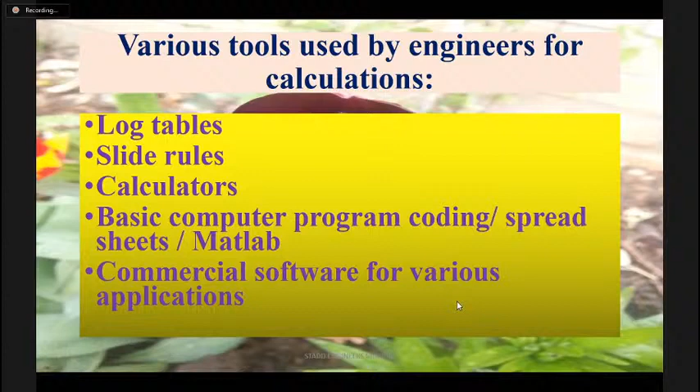And then going further, there are some commercial software programs. Those are of course available for various different applications. I am just going to show you the summary of the programs which are available for civil engineers. But in principle, we have to understand that hand calculations cannot be substituted - there is no substitute for the basic engineering understanding, even by any powerful software program.

So what kind of programs are available? Just for information, I think everyone knows about that, but I'm just making a list of the available tools. I call the software program nothing more than a tool, a very advanced tool. So there are different categories.

One is a drafting tool, which we need all the time in engineering offices. The most popularly used is AutoCAD, used for making our drawings or sketches, the drafting part. MicroStation is another program used around the world, similar to AutoCAD but a different platform, of course.

Autodesk's product is AutoCAD, and MicroStation is the Bentley product. Then there's another program becoming more and more popular because it's very cheap compared to other software programs, the ZWCAD. There are so many other CAD based software available, and people use these tools basically for doing their drafting part.

Then there are some finite element tools also available, generally used in all the research institutions. If you look at any MTech or PhD projects, I think most of the work nowadays uses these finite element tools for their projects.

There are popular programs available, like ANSYS, which I think is the most commonly used finite element program package. Then Cosmos, SolidWorks, Abaqus, Nastran. There's a very big list available, but I've just noted a few programs.

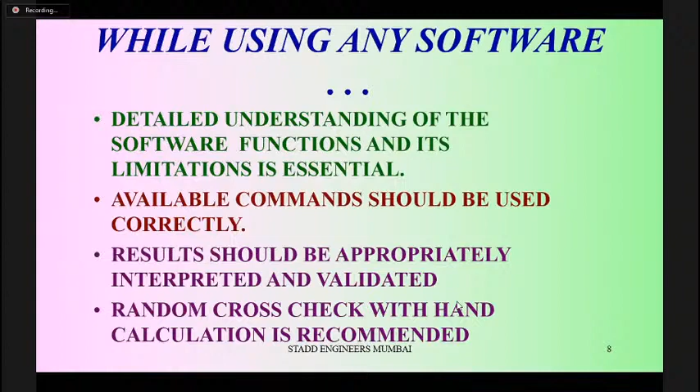For that, you should have some basic calculations with you. We insist that some random cross-checking is very helpful, comparing results with hand calculations. So STAAD or ETABS may be designing hundreds of beams and columns, but at least one column you should do by thorough hand calculation. You can take out the forces from the analysis, or do a simple moment distribution calculation to get moment values. Then check the steel required, the stirrups required, and whether the software gives values close to that. Cross-checking is very important - I cannot rely 100% on any software in the world. That must be very clear.

Now focusing specifically on STAAD.Pro, which is mostly used by design offices - many people use it, a very popular program for analysis and design used world over. This is a general purpose software, so there isn't just a specific type of structure it analyzes. Any kind of structure you can model - a dome, or different types of truss configurations, you can analyze.

But ETABS is specifically for building type structures where you have a typical floor plan, mostly concrete structures - it's very powerful there, and also popular. But STAAD is a general purpose program - any type of structure you can analyze and use this software for.

Data can also be transferred to other modules, for creating drawings, connection designs, or foundation designs. Once you do the analysis, you can transfer the same data to another program. In ETABS and SAFE, once you analyze in ETABS, the data can be taken to SAFE for foundation design. Similarly, once you do the analysis in STAAD.Pro software, the same data can be transported to the STAAD Foundation Advanced module. Basically, the support reactions are transferred, and you start the foundation design from those support reactions.

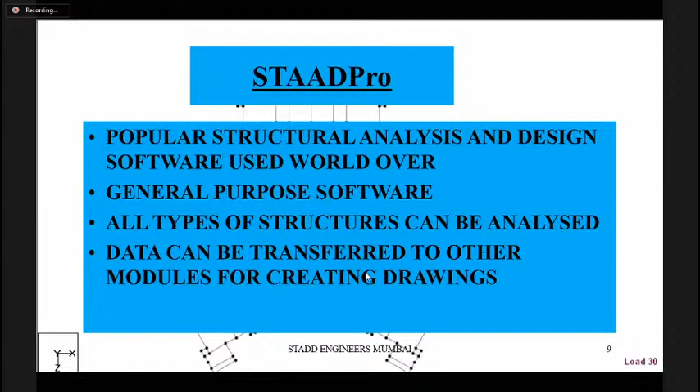Now I'm going through the small steps in the model. I'm not going into details of all the software packages, but the important steps and critical points you must understand, I'm noting down. The first important part is understanding what the software computer program basically does.

We have to make a model which the computer program can understand. We have the real life structure which we are going to construct. So we are trying to simulate the real life structure into a mathematical model which the program or software can read. It is a mathematical simulation process, basically, what we are doing.

The results depend on your model, how good and how accurate it is. So the accuracy of results will depend on the model you build. But from my experience, I suggest it is always preferable to have a very simple and approximate model than a more accurate but very complex model.

People try to use very accurate models with secondary members, small cutouts, small beams, fine meshing for all the slabs. By this, the model becomes more and more complex, and you feel you get very accurate results. But I think that is not the case, that is not the real case.

An approximate model with basic framing is good enough. I prefer the approximate model all the time, because if the model becomes more and more complex, you are likely to make more and more mistakes in it. That is the real danger in a complex model.

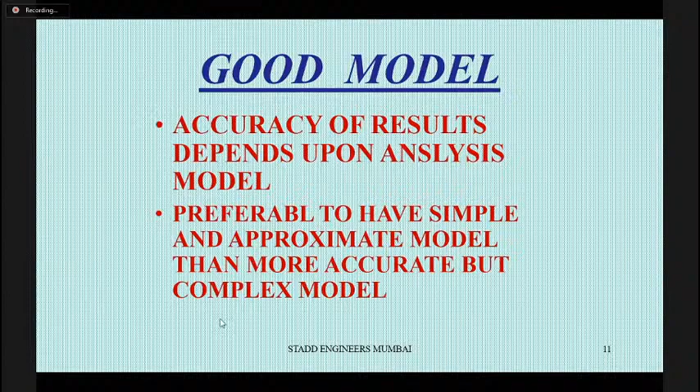We have to keep all this in mind. Sometimes we face problems in government departments, where proof checking is done by certain people who literally check number by number with decimal points. I think that is not how civil engineering works - you have to grossly see the range of the results, that is more important.

Structural arrangement is to be decided in consultation with your architects and clients. You need experience to do a better structural arrangement, which gives better structural performance and an optimal solution.

How do you decide preliminary member sizes? There are some guidelines available, but that mostly comes from experience. Once you've done different types of structures, from your database and experience, you can decide what column size or beam size will be required for a particular type of structure.

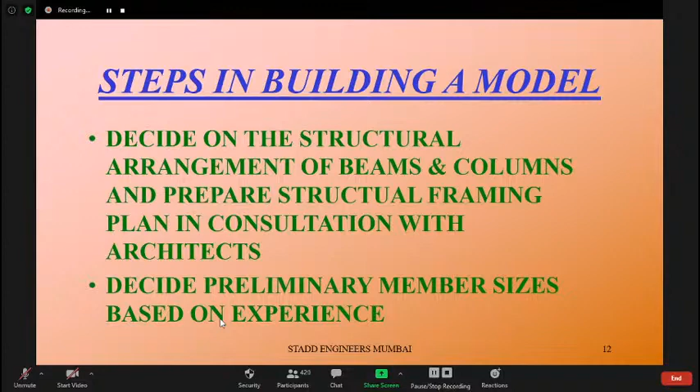These are the basic steps for building your model. For any computer program, you cannot just say 'this is my building, do the analysis' - you have to give all the properties and sizes initially, even for the analysis. The program cannot decide on its own what kind of sizes you need to take.

There are different ways you can generate a model. There is a simple text editor available, and you can also make a model graphically. A structure wizard is also available, from which structural libraries are available.

You have to just pick up the structure and then modify it based on your parameters like height, width, and the spans. That can be modified. Or you can, of course, import from CAD.

Apart from the first part, I think the three steps are generally available in all the graphical modules in other software packages. That has got the advantage. It has got one more option of a text editor, which is, I think, more popular and more powerful for making the data very fast.

Once you make a model, again a simple model with frame members, you can make a data file which can again be analyzed graphically. You can check it. So you can make the model with finite elements if you wish.

But slabs are generally not required to be modeled with finite elements. People sometimes say, okay, we model everything. I think ETABS does that. There is an automatic mesh option also available.

But basically the slab loading has to be transferred to our beams, and you have to take the diaphragm action into account. That is, I think, the more important part. So that can be indirectly taken care of in the STAAD program as well. There is a diaphragm option available so that you can use it.

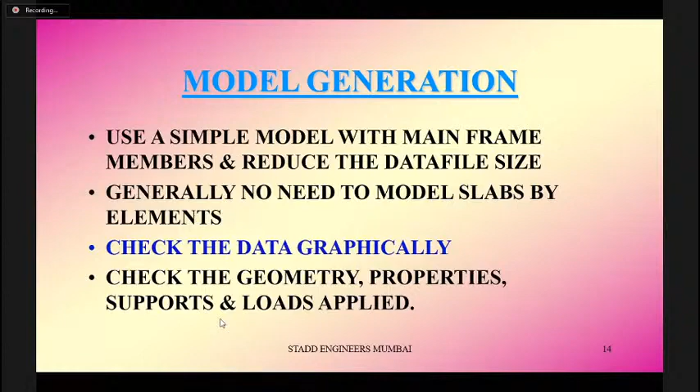Then you have to specify the constants, like what kind of material you are using, the modulus of elasticity you need, the Poisson's ratio, and density. These are very important constants you have to give, along with the supports. Without that, you cannot build a model. So these are the prerequisites for generating the geometry for your structure.

So this is the basic preliminary model that you have to make first. Once the model is ready, you have to check it graphically, and then you go for the loadings.

Based on different codes available, dead load, live load, seismic loads, and wind loads, you have to apply the loads on the structures, and then do the combination of loads for the design purpose.

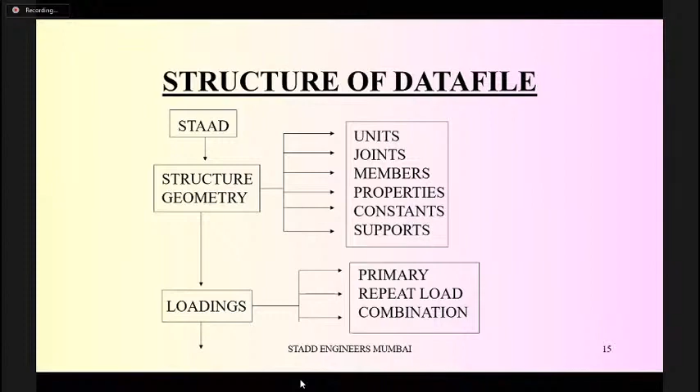Once the loading is applied, you have to check it with the graphics, whether loads are applied correctly. The summation also you can get, and check whether the loads given are correctly applied on the structure or not. And then you can perform the analysis using the software program.

And then after doing the analysis, you get the output. In the output, what you basically get is all the geometry you can cross-check, you can get all the support reactions, all the member forces, including your bending moment diagrams, the deflection diagrams, and all these things. That is a part of your output.

Different load combinations as per code provisions - say IS 456 talks about different load combinations for the limit state method. So for that particular combination, you can go for design. The next step will be your design, either concrete design or steel design.

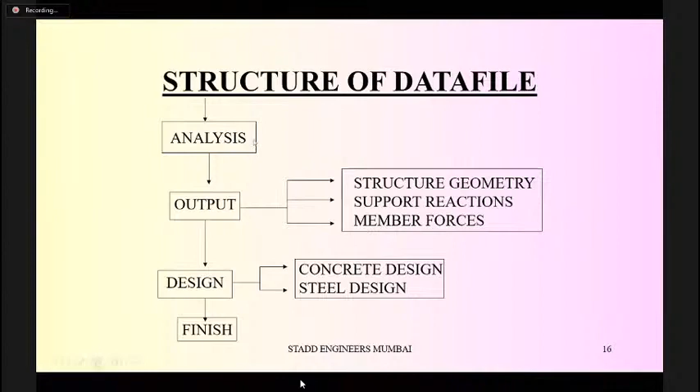Now, steel design also, as per the revised code, is as per the limit state method. Earlier code talks about the working stress option also. So some programs provide the facility for working stress as well as limit state both. So this is a general flowchart for any kind of software program, how it works and what steps are involved in using the software package.

Now I'll just run through the steps again. Different units can be used in the software. Again, you have to be very, very careful in defining the units. Generally, we should have consistent units all the time, so there is no confusion.

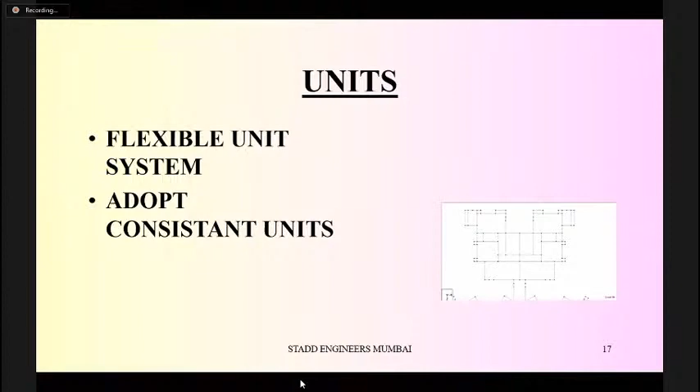So you start with kilonewton and meter, then keep on using the same unit. Otherwise, in between, if you use different units, there may be some confusion sometimes. So that is, I think, one of the important parts one has to remember. But instead, you can, of course, choose multiple units in different locations.

You can give property in millimeters, define member or joint coordinates in meters, and so on. I'm not going into detail on everything, just explaining the steps involved. You have to define all the intersections of the structure, the joints, and then connect those with a member, which forms your beam or column.

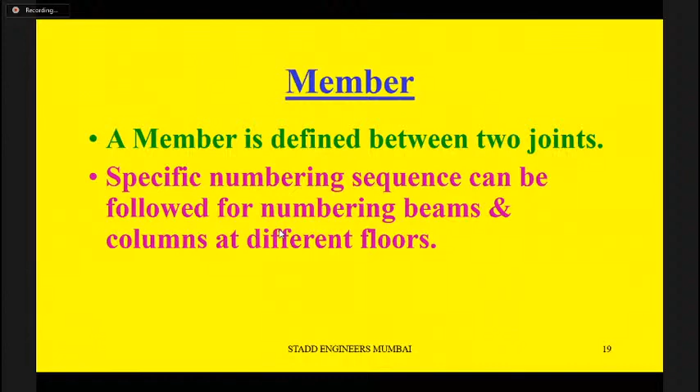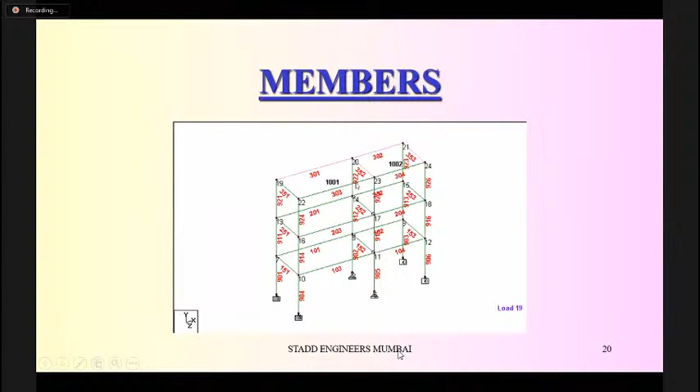Again, people using some software package may not fully understand the application. For example, connecting a beam element or column with a finite element, which is a 3-dimensional finite element, can give you instability.

So there are some instability problems. One has to understand what kind of degree of freedom to use in a particular system. If you define a structure and declare all the supports as, say, rollers, the entire structure can keep sliding, causing a stability problem. Software is a tool, but you have to use it correctly, otherwise you will end up with problems.

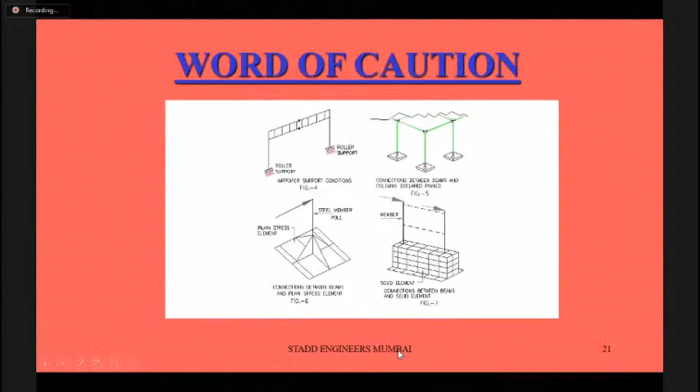Once the structure is ready, you have to give the properties. It can be from the steel table for steel structures, or prismatic sections for concrete sections, or you can have tapered members also. Profiles are also available that you can assign.

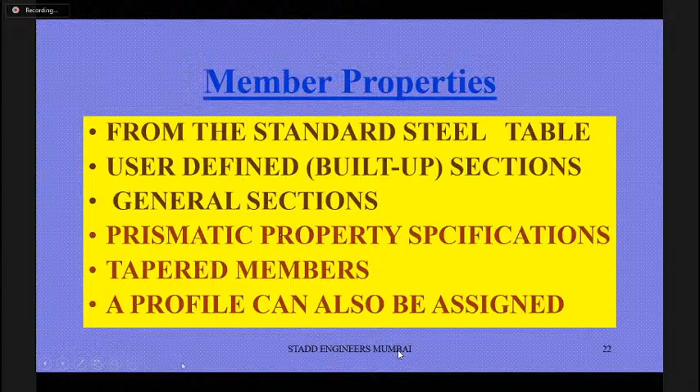I'm not going into detail on elements, but these are some precautions on how you decide the element. If you're studying finite element analysis and application in post-graduation, this part is more important. Software tools are available with guidelines, and automatic meshing is also available nowadays, but some basic fundamentals should always be understood by the user.

The aspect ratio of the element should not be more than 4, otherwise you will not get a good result. The element should be convex, not concave, otherwise you'll land up with problems. These are some finer points one has to understand while using this type of software. Otherwise, people use the software but get erratic results, and there are reasons for that if not used correctly, which one has to understand.

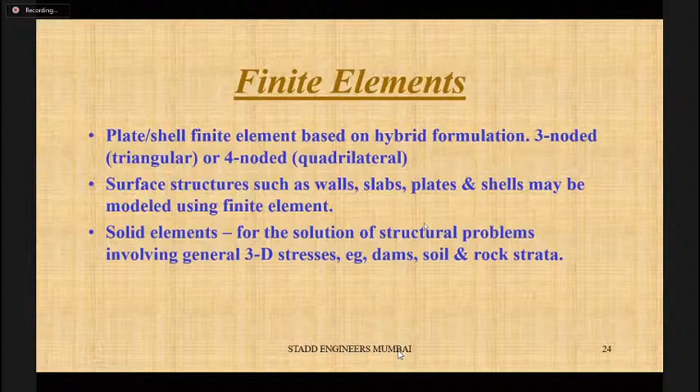So based on the type of application, you have to choose the correct type of element for the model. There are some miscellaneous commands always available in all types of software. One is the orientation of the member, which is most important, otherwise people make mistakes on whether the column is placed horizontally or vertically. You have to tell the software correctly, otherwise the results will be different.

Then there are some member releases, I will show you some pictures for that. Sometimes it depends on the connection you are designing for a beam to column, and then you can release a moment. If you are designing just a shear connection, it will not take any moment.

So in that case, in your model also, you have to release the moments, otherwise the results will not be consistent. And there is the member offset command as well. I will show you some pictures for that.

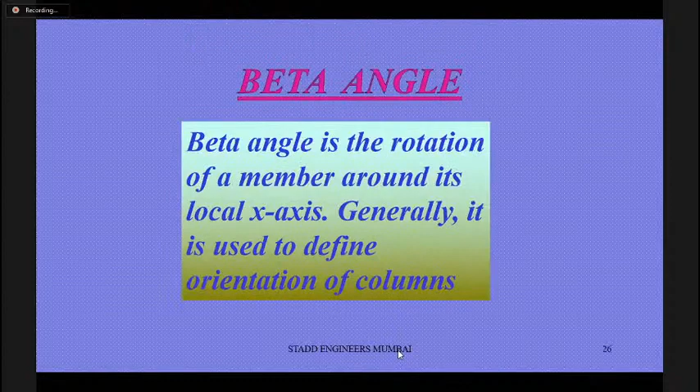Beta angle is the orientation of the member around its local x-axis. That is what is called beta. In the next picture, you can see it very clearly.

Beta is 0, the column is in short. If you see in plan, it is oriented horizontally. But if I want to turn the column in the vertical direction like this, I have to rotate it basically by 90 degrees. So that is what is defined in terms of rotation angle.

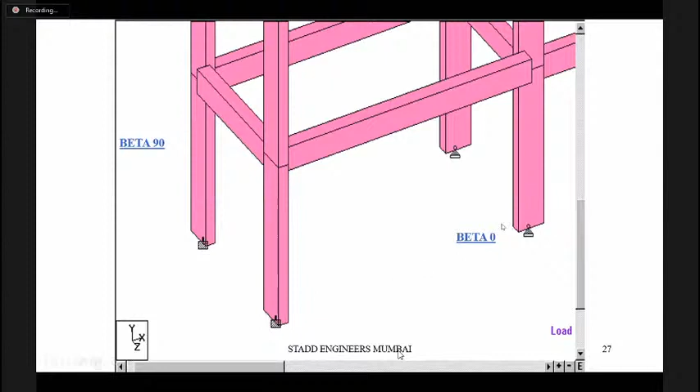So the size is same, maybe it's 230 by 600 in both cases, but one is horizontally oriented, one is vertically oriented. So you have to tell the program what your intention is.

Then, as I said, member release is again an important option available in most software programs. Whether one end is to be released or both ends, it depends on the type of structure you're analyzing and the connections you are going to use. Sometimes partial release is also possible, but it's a very tricky command — you have to use it with caution and full understanding.

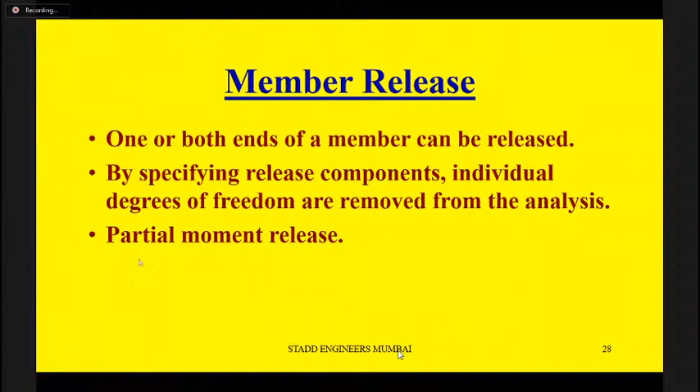So that's the most important thing. Member release is also a very important command.

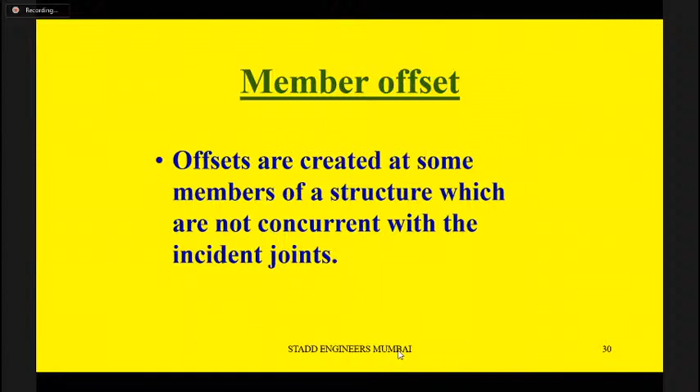The load is transferred at the face of the column here with this much eccentricity — half the depth of the column is the eccentricity. If you want to take that effect into account, you can use this option. As far as the offsets are very small, it doesn't matter much in the analysis, but if the column is like your shear wall, it makes a lot of difference. So one has to understand where exactly to use this command and where you can ignore it — that is your expert judgment.

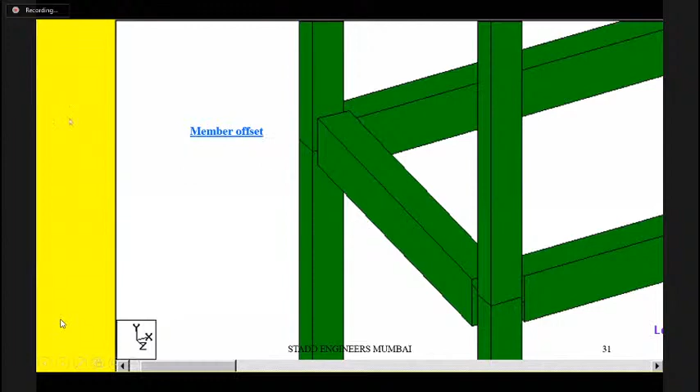That is very important. Then there are some special types of members also available in STAAD, for example active and inactive members, used for bracings, because bracings are capable of only taking tension, for example, and otherwise they are inactive. They take only lateral loads whenever there is wind and earthquake load, so those bracings are designed only for that type of loading, but for vertical load, they are made inactive.

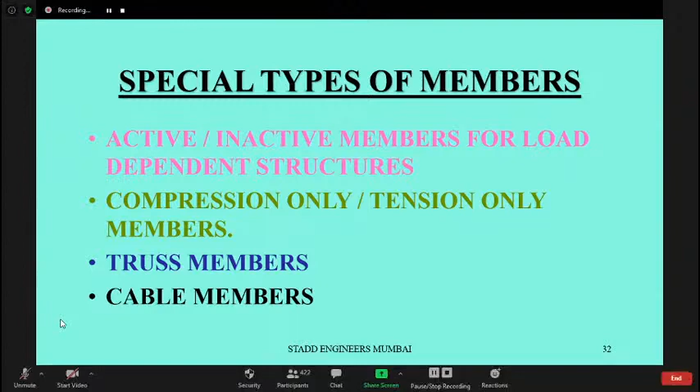So that is another option available — you have to just make it active or inactive, or you can make it a compression-only member or tension-only member. If you declare a member as a truss member, it will not take any shear or bending, it is a purely axially loaded member. That kind of declaration you can make. Or cable members, which can be a pure tension member with the sag taken into account.

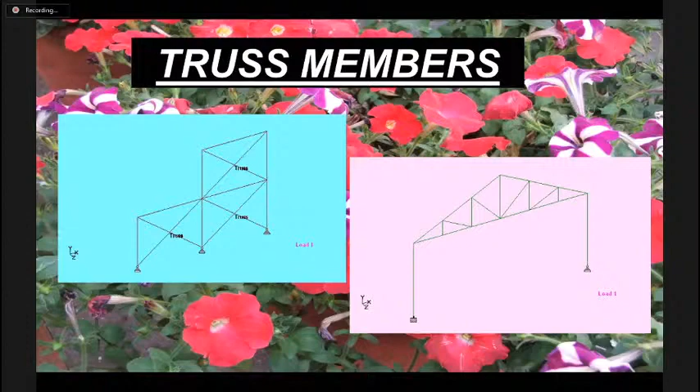There are some type of cable members you can utilize as well. This can be supporting members for your bridge-like system, or you can have cable-supported guy rope towers and all - there you can use the cables. So basically these are purely tension members.

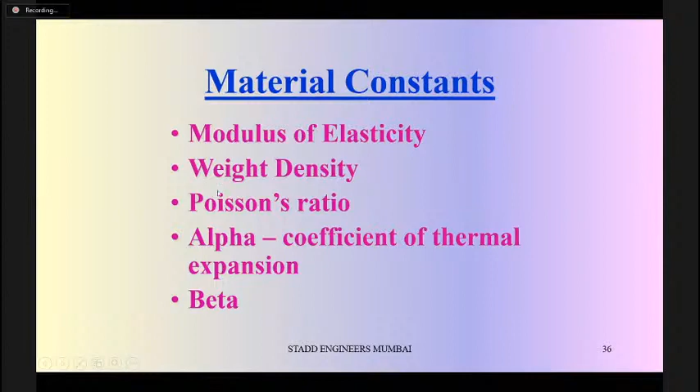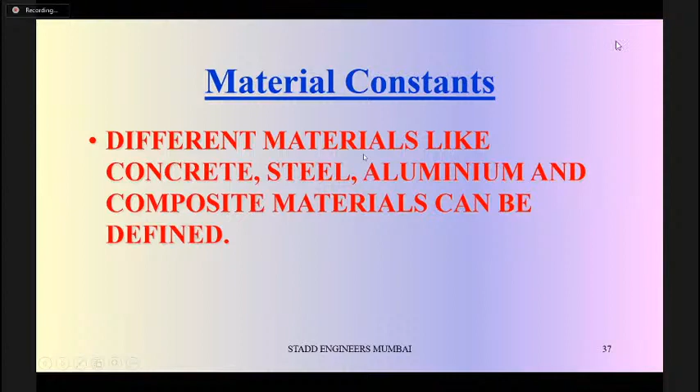Again, after you do the specification for your members, you have to give the material constants also. As I said, modulus, density, Poisson's ratio are very important. If you are doing some kind of temperature analysis, then you have to give the coefficient of thermal expansion as well - that is called alpha in STAAD terminology. So these are the options for any material you have to give for doing the analysis, and for that you have to give the constant. Different types of materials, of course, I can have aluminum, steel, timber, concrete - all these materials you can use, and you give the numbers corresponding to those constants.

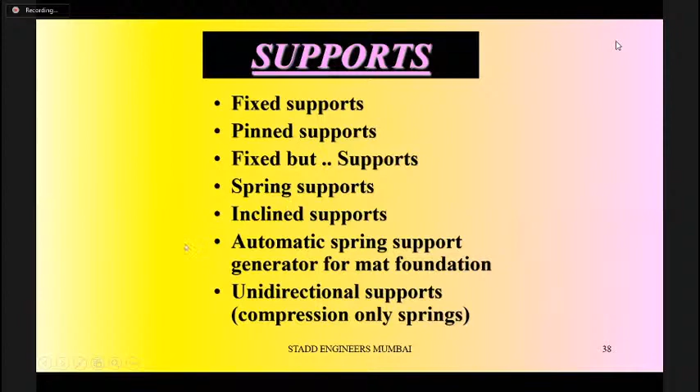Supports are again a very important part. Generally, we have the fixed support or the pin support - these are the most commonly used supports. But there are certain other types of supports where it is not really pin or fixed, but roller type of support, where you allow displacement in one direction. That type of support is also very important. You can have spring supports as well, where you can simulate the soil-structure interaction using soil springs. So different types of supports are available, and you can utilize them based on your requirements.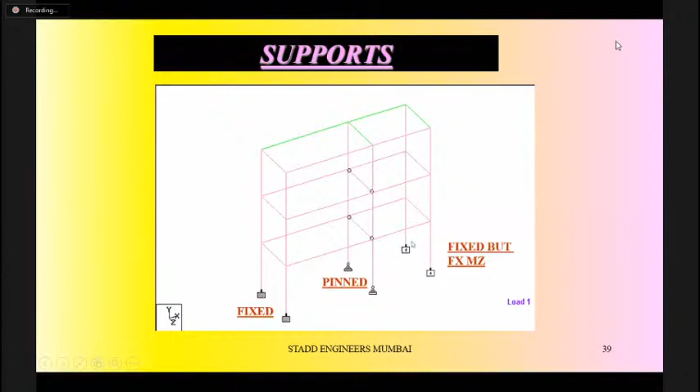This is one simple example I want to show to all my students. It's a very important part, because when you design something, the boundary condition is very important - support conditions are very, very important. There are some mishaps that occurred because of wrong boundary conditions, where the software program was okay, but the boundary condition was wrong. Recently, I think there was some failure in Delhi also - an auditorium roof came down simply because the boundary condition was not simulated correctly.

For example, if you want to analyze a simple truss, what is the correct boundary condition? One should always be a pin support and the other must be a roller support, allowed to slide - only then should you get a correct analysis of this type of system. By mistake, if you just define both the supports as pin supports, the behavior of this structure is not the same. Why? Because if you look at the forces in the structure with both supports as pin, the bottom chord generally should have tension - if I put a vertical load like this, it should be in tension and the top chord should be in compression. But that will not happen if I put both ends as pin support.

You can just try doing one analysis, and if you find that the bottom chord is not taking tension, that means you should understand there is something wrong, and the forces will be totally different.

The bottom chord force will drastically reduce if I just put both the pins over here. What happens? Because there is a thrust generated and the support is not allowed to displace, there is a lot of thrust generated in this member, and that's why the forces are totally different. So if you just make a mistake in this type of boundary condition analysis, the structure behavior will be totally different, and one has to be very careful for this type of stuff. Otherwise everything is okay, only you have made a mistake in defining the supports.

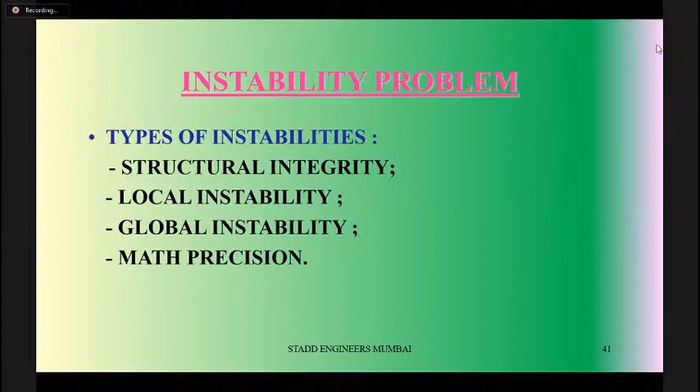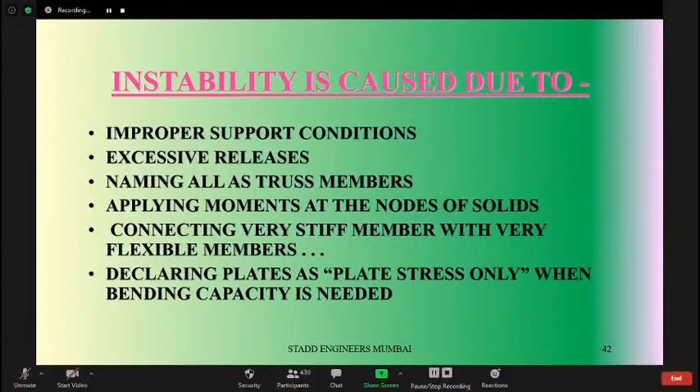That is called some kind of mathematical instability or precision problem that comes. Or if you connect a very rigid member with a very flexible member, then that kind of problem will occur. So I think this is some theoretical background, but one must keep that in mind, very important to understand what's happening and avoid problems in the model, so the model will not be correct otherwise.

How do you find out that there is some instability in the model? You have excessive deflection - that is the first indication. The structure will have a large deflection, maybe a few meters or few kilometers. If that happens, you have to just check the structural geometry and the support conditions correctly, otherwise there is some problem in the model itself - the geometry is not correct, or some boundary conditions are not defined correctly. Or you get very huge stresses, infinite type of stresses - so there is some problem in that model.

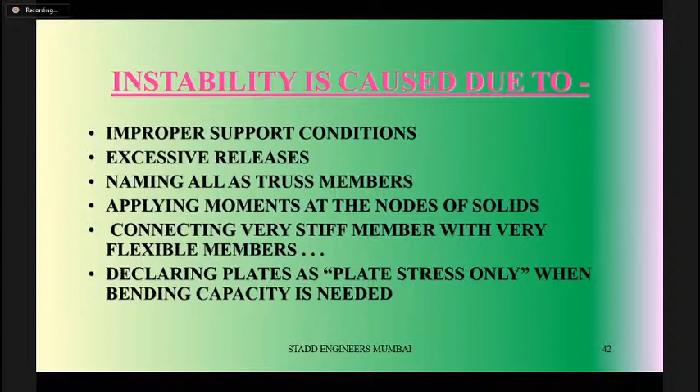So the two things I will suggest: one is you can look at the load path, basically you can see the deflected shapes. If you have got very excessive large deflections, then you assume there is some problem in the model itself, or some loads are getting lost. So there is a very important command available called the static check - whatever loads you are applying, the summation must be equal and opposite. Suppose if I am applying a 100-ton vertical load, I must get a reaction of minus 100, opposite direction. If I am not getting the same reaction, some loads are getting lost, then there is some instability problem.

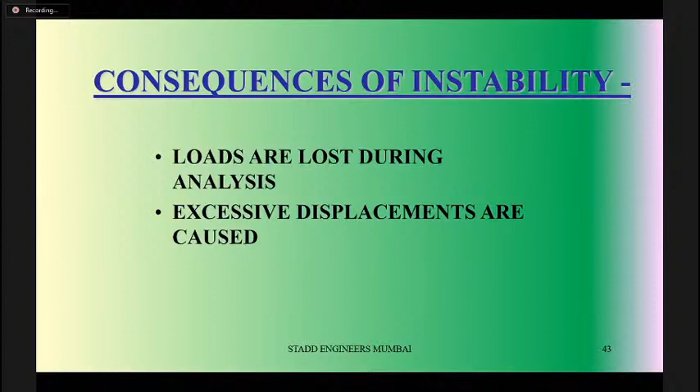So these are the two indicators I am just indicating for your information, that these are the indicators for tracking instability issues in the software. Otherwise, now people are just putting some buttons and then putting some data and getting some output without knowing whether it is done correctly or not. So I think these are some of the important cross checks one has to keep in mind.

There are very special topics, but I am again not going to go into details, but there are some shear wall modeling issues, and one has to be very careful in modeling this type of structure. Correct modeling is also very important, but we'll not go into details of all these things. Then diaphragm action of slab is also another important aspect where you are not modeling the slabs in the physical model or in your computer model, so you have to simulate the action by indirect methods - diaphragm action can be simulated by various ways. And of course, you can use finite element application for different types of domes or tanks or some flat slab where you don't have any beams as such to define, so there you can use this finite element method as well.

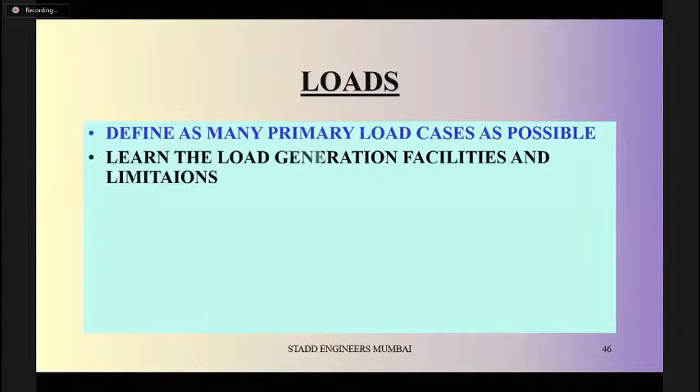Now, just briefly, I will touch upon - I think we have some more time, 15 minutes - so I will try to just touch upon some loading, what kind of loads are available, and how do you see it on the graphics. So different types of loads, of course, you can have, so we have to learn it properly from the particular software requirements, and you can check the loads graphically.

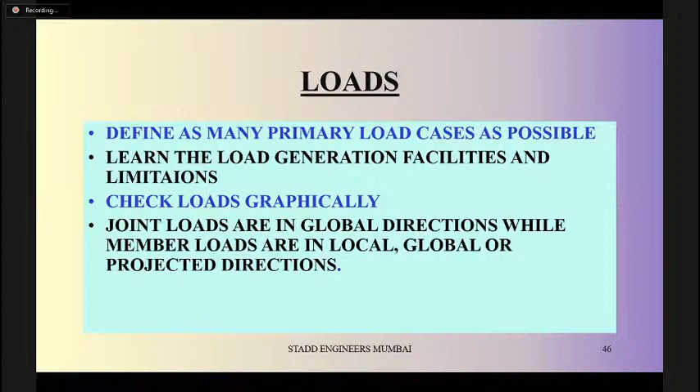Once you apply the loading on the structure, like your dead loads, wind loads, joint loads, member loads and all, you can just check it graphically. It can be either in local direction or global direction. The directions are also very important, you have to cross check that it is done correctly.

There are some load generators also available. One is a wind load generator, another is a moving load generator. Moving load is generally used for bridge type applications where the load is moving, it may be class A vehicle, class B vehicle. You can move it on the structure and it will generate envelope loads for the bending moment and shear force diagrams. Seismic load also can be generated in the software based on your latest code, IS 1893.

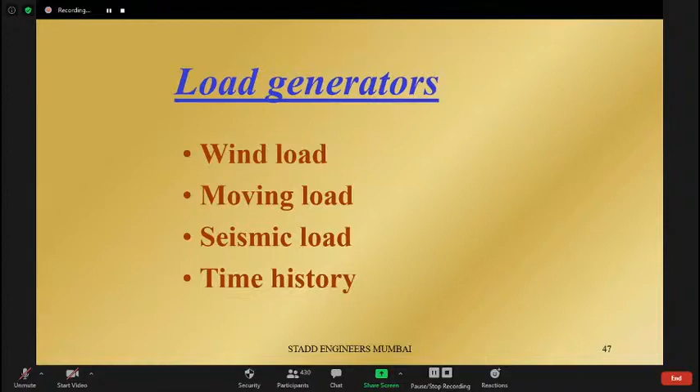And you can have time history analysis. This is basically a pure dynamic analysis for vibrating machine type of problems where you want to study the vibrations.

And there are floor loads available. As I said, I don't want to model the slab in my structure, but I can take the two-way distribution into account. That is more important by using the floor load option, and you can see the distribution shown on the right-hand side. So the two-way distribution is applied on the beams finally, and the analysis can be done.

Then there are some pre-stress and post-stress loading also available, wherein you can simulate if I have some pre-stress beams in the structure. I can apply the pre-stress force on that particular beam.

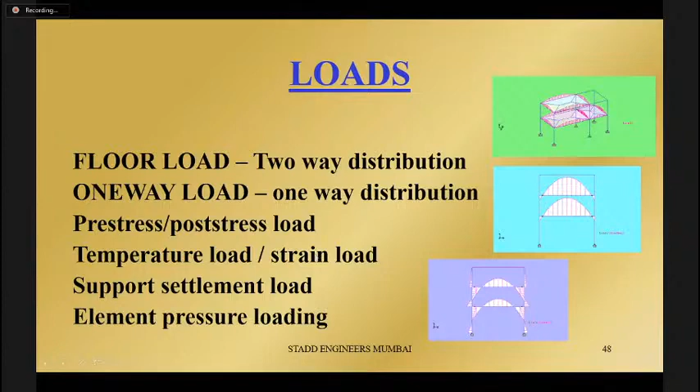Or in the analysis, you can have the temperature loading. There's the rising temperature or differential temperature, where outside temperature may be more and inside temperature less, and so on. So that kind of simulation also you can do wherever it is required.

The wind loads are also there, which can be generated directly by the program. But again, one has to check that loading, whether it is doing it correctly or not, because as I said, there are some limitations in all the software programs. So one has to understand that, and then you can use that program.

So always I say you have to do some basic hand calculations to understand whether you are getting the required results or not. Wind load calculation is not that difficult -- you know the average intensity of the load or pressure multiplied by the surface area of the building face, and you can get the approximate value of the wind force generated. So you have to check whether the program is generating that kind of load or not.

This is a graphic representation of wind load. Here we are generating the wind on this face of the building. These type of loads are converted into joint loads at different floor levels, and the summation of this load must be equal to your total wind load on the building. So that one must cross check.

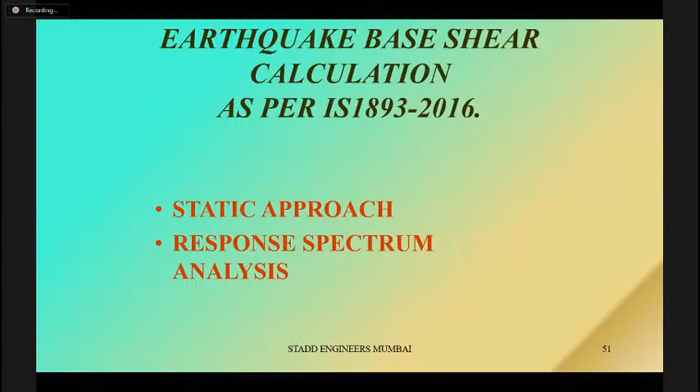Same thing happens with your earthquake or seismic loading. As per the latest code, you can generate a load on the structure. Two approaches are given in the code: one is called pseudo analysis approach, that is, we are not doing the real dynamic analysis, but it is a static approach -- converting the actual earthquake loads into equivalent static kind of load, which in the earlier code was called the coefficient method of analysis. The other is called the response spectrum method of analysis, which is more detailed dynamic analysis, but both options are available in the program, so you can perform analysis based on these approaches.

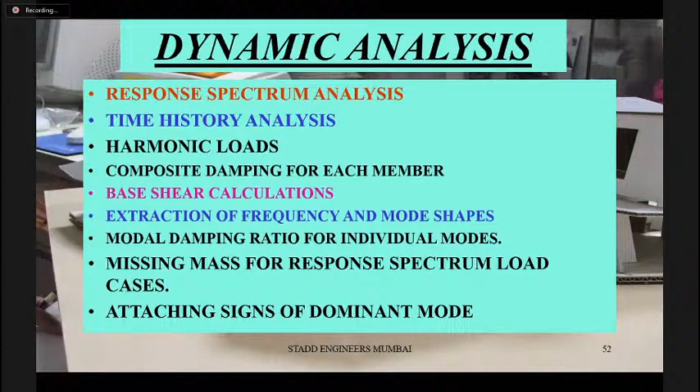Now these are just some of the options available in dynamic analysis. I am not going into details of these options, but there are various options available, like you can put harmonic loading, sinusoidal loading on the structure, and do frequency calculations. You have to always check the resonance, because your machine frequency and the structure frequency should not match, otherwise that will lead to resonance. So that kind of thing can be done in STAAD analysis.

This is a sample example of mode shape, how the structure is going to vibrate in different modes of vibration, under response spectrum. You can see different modes of vibration, and now the new codes talk about this type of analysis -- the first two modes need to be translational modes, and the third mode can be a torsional mode. Otherwise, if the first mode comes out torsional, then that structure analysis is not valid -- you have to modify your structural arrangement and framing, since the structure is not competent enough to carry the loads. So that is another thing we can check with the software.

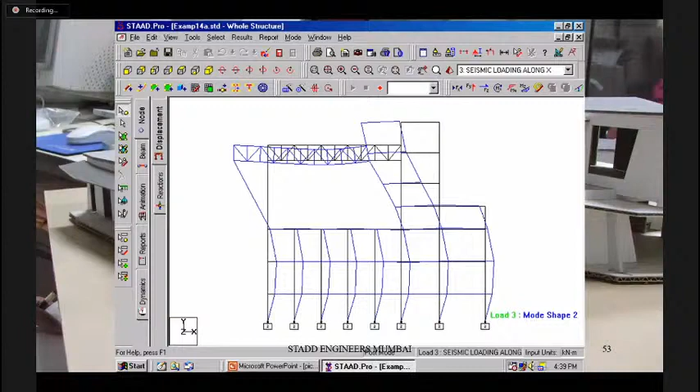Then once everything is okay, you can go with the analysis, and then finally check the results.

There are various ways you can verify the results. There's a text output available wherein you can read the numbers like support reactions, bending moments and all. And graphically, on the screen, frame by frame, or grid by grid, you can check the results.

Deflected shapes are again very, very important, and I think you must see these before proceeding to your designs. So after the analysis, the first step will be to see deflected shapes for vertical loads, for lateral loads, and all.

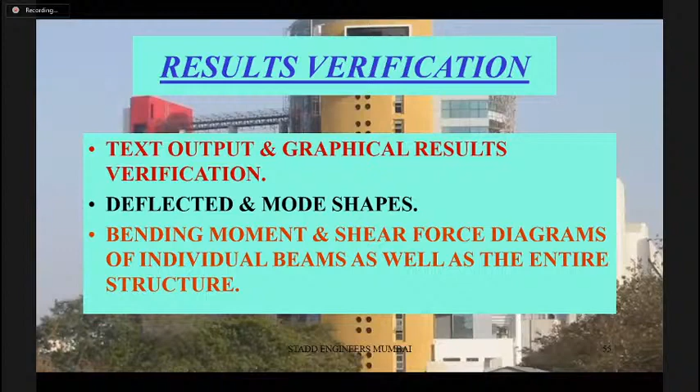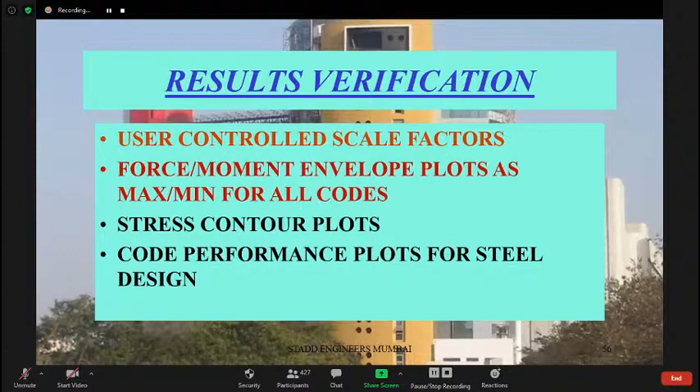And see whether the structure is really behaving the way you intend it to. Next will be your envelope plots. For finite elements, you can see the stress contour plots. I'm just showing you some pictures of that, just to understand. As far as the design part is concerned, you can have the code performance or ratio check, so that you can graphically find out whether it is doing it correctly or not.

So for example, I'm just trying to show you some simple diagrams. Everyone is aware all the software packages will produce this type of diagrams. This is a deflected shape.

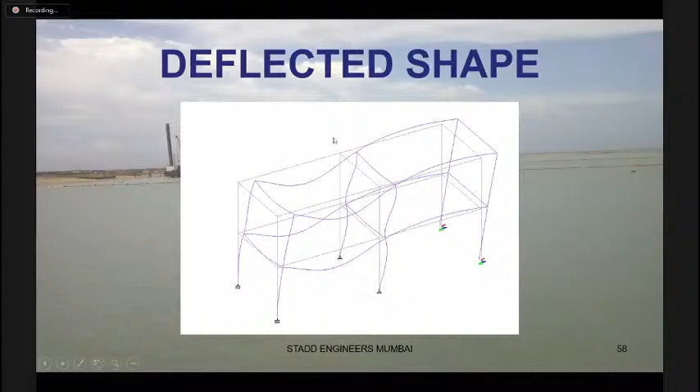If I'm putting a load on the structure which is unsymmetrical, placed on this particular panel, there is a sway in the structure. The vertical load is definitely still unsymmetrical, so the structure has some sway. You can see there is displacement in horizontal direction as well as in vertical direction. This is a deflected shape of the structure that one must imagine and understand what is happening in the structure.

Same way you can see bending moment diagrams. For the continuous beam here, you can see there is a bending moment - positive moment here, negative moment here, and more negative moment over here. Some part is taken by this column, that's why you don't get the same bending moment at both ends. So the moment in the beam on the right hand side plus the column moment is equal to the moment in the other beam - there is equilibrium at the joint also which has to be satisfied.

If you want to see the value, you can read it in the table, wherein the diagram is also available along with the values. So for the entire structure, you can check for a particular floor level or a particular member, the bending moments and the values.

Same way you can look at the shear force diagrams - I will just quickly run through these pictures. And then this is axial force. I think this is a very, very important diagram. People generally ignore this, but it is also very important. One must see this diagram as well.

This will tell you the load path in the structure. A lot of speakers, like Umesh Joshi sir and Ghate sir, also talked about the load path, because whatever load you apply on the structure has to finally be transmitted to the foundations. You must see that the load from the top of the structure, like the roof, travels through the beams to the columns and then finally to the foundation.

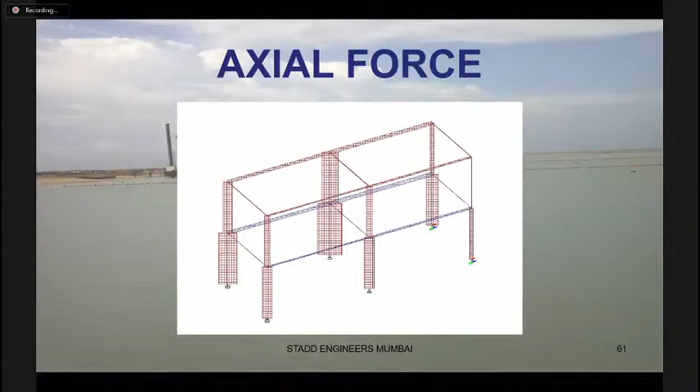So the load has to travel in a particular direction, and the axial force should keep on increasing - you can see this from the diagram very clearly till the foundation level. This is a very good diagram which gives the idea about how the load is getting transferred in the entire structure - whether dead load, live load, or lateral load, how it is getting transferred to the foundation. One must see these diagrams as well, along with the bending and shear force.

This is again a mode shape diagram - this is the first mode of vibration, a fundamental cantilever mode of vibration. The structure vibrates in this particular mode most of the times.

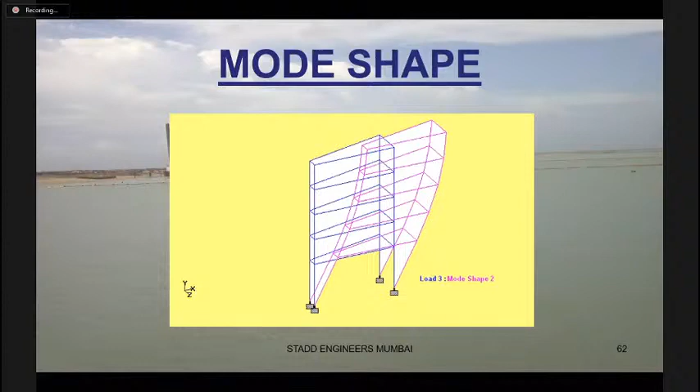This is called the first fundamental mode, also in dynamic analysis. So all these diagrams you can see.

If I am doing finite element analysis, someone is very much fond of using plates for the slab analysis and all. So I can just mesh this entire panel in a 4x4 grid and apply the loads. What I get is this diagram, called the stress contours. The problem is it is very difficult to interpret the results of this type of contour.

Finally, what we are interested in is putting the reinforcement, so we should put top range steel or bottom steel. That is more important for us, and what is the bending moment. So only expert interpreters can understand this finite element output.

That's why generally I suggest that unless you are very much conversant with finite element analysis, you generally should not use this, because there are a lot of options available in any software which you cannot interpret. You should not use it, otherwise there are going to be mistakes. Of course the tool is very powerful, you can use it wherever required with the guidance of experts.

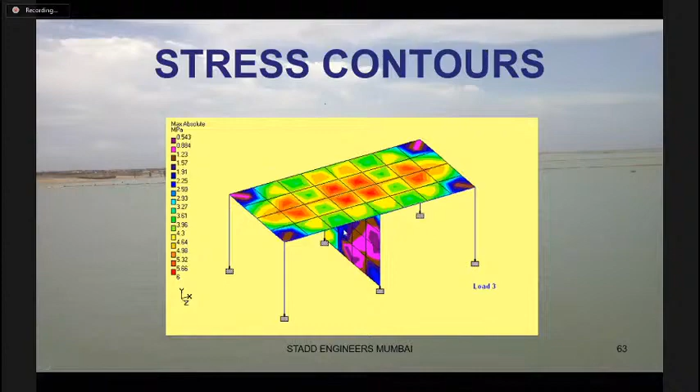As far as results are concerned, as I told you, you have to check deflected shape, the support reactions, you can get all these things.

Then check the result by your basic hand calculation. I think that is very, very important, you should not miss that. Otherwise there are some blunders people are committing.

When we check some design calculations submitted for proof checking and all, then we find that initially there is some mistake in the units itself. So all this, whatever program they have run or result they have generated, is all useless. These are some mistakes one should try to avoid.

Or there is some decimal point mistake: instead of 10, you are giving some 100 value. And the column load, instead of 10 tons, it becomes 100 tons, this type of mistake. So that should not be happening.

I think one has to have some kind of feel of the structure, and one should know the values, what I am expecting from my analysis output. Then of course you can just cross check.

I think Vatsal talked about the P-delta analysis and all. So those are also available in most of the packages: P-delta analysis with non-linear analysis and dynamic analysis. These are all advanced topics of discussion.

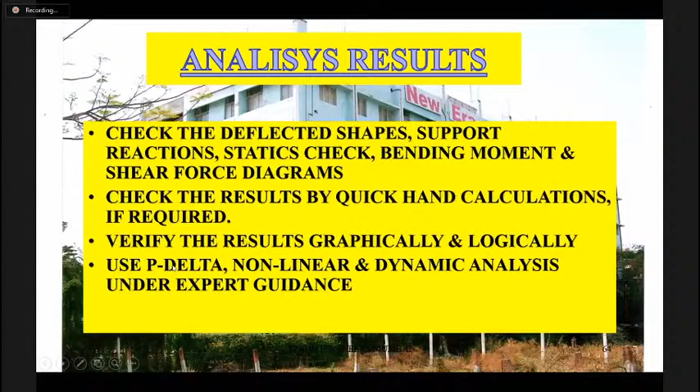It depends on the type of structures you are analyzing. For very tall structures, the P-delta effect is also very important, then you should consider that. So the facilities are there, you have to understand it clearly and then use it. That is only my submission.

One important part which is always to be kept in mind is that your assumptions in the analysis and design should be consistent all the time. Whatever you are assuming right from the model preparation should carry forward to your model building, and should be the same in your analysis and same in your design.

For example, if I am releasing some moments, if I am doing some kind of simple connections, say for example shear connections, these are the examples given. So I'm assuming that is a shear connection only in steel structures, so in the model also I have to release the moment. That I have to remember.

I cannot just analyze the structure without any release, or without rigid joints, and then after that detail it as a simple joint. So the point is you have to be consistent in the assumptions in the beginning itself, what kind of detailing you are going to follow.

That dictates your type of connections, and based on that you have to release certain moments wherever required. Sometimes torsion is neglected in the beam design, but then you have to release torsion in the analysis also, which is not done. So this is not consistency then.

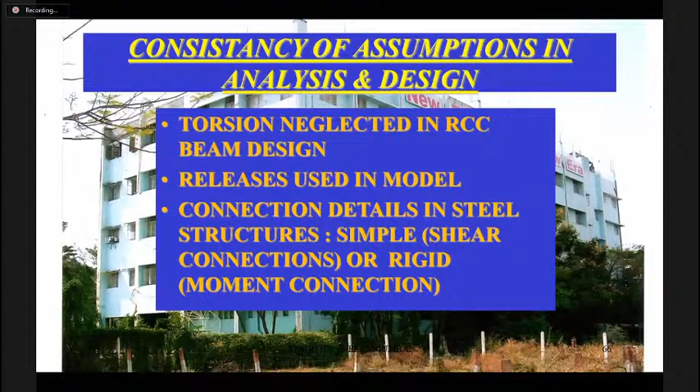If I'm taking the torsion in my analysis, then I have to design for it in my actual design also. So what I mean is basically you should have a consistent approach in the modeling, assumptions, analysis, as well as design and detailing. So detailing should follow the same procedure. That is, I think, very important, must remember this.

As far as steel design is concerned, the important part is the correct design parameters, because the software is taking some kind of default values of parameters.

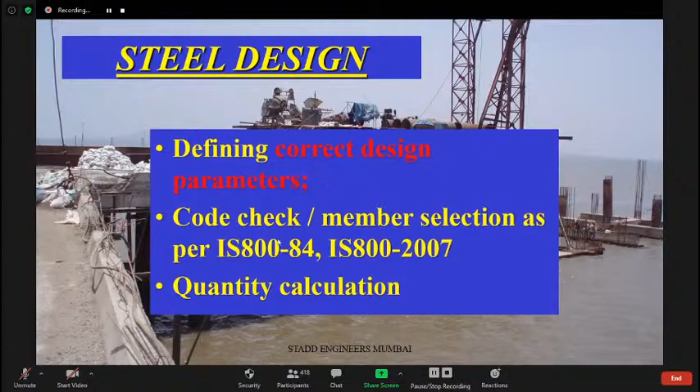The most important parameter in steel design will be your effective length. You have to be very careful in giving the effective lengths, otherwise if you give the wrong number, the design will also be wrong. This is a very crucial point, Vatsal also raised it. The column height, whether single floor or double floor, depends on the tie you have at the entrance level, and that dictates the effective length of a particular column member. Same thing happens in steel structures as well. So the parameters are very important, and you have to be very careful in defining them.

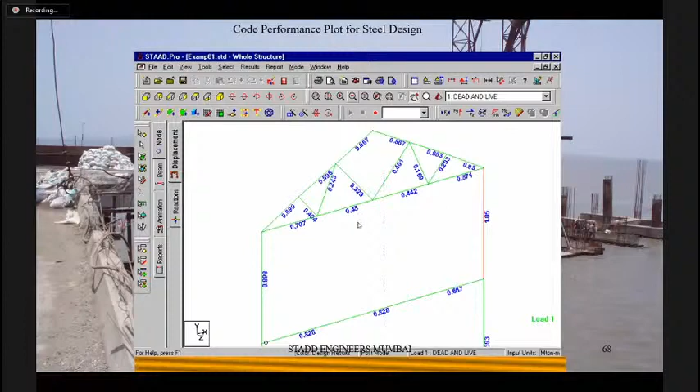In concrete design, you have to give the correct parameters - like grade of concrete, whether you are using M30 or M40, and grade of steel as per your requirement, as per IS 456. Cover to the reinforcement is another important parameter for column and beam designs. In the column, the most important part is defining the arrangement of steel, which is crucial for correct designs - whether you put steel on all 4 sides or only 2 sides, that must be clearly defined in the program. Then you get the correct results.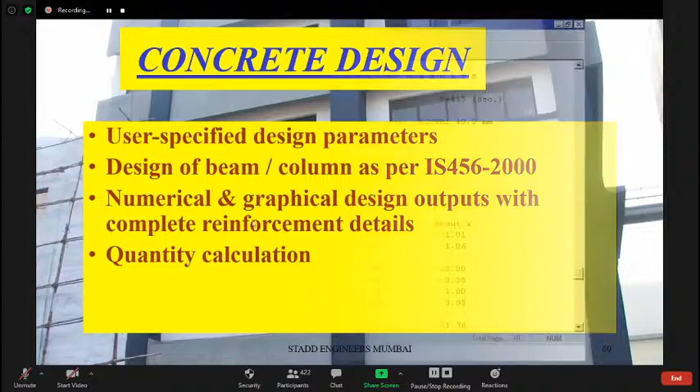As I say, you have to cross check with one simple sample problem when you do software design. Now I'm coming to the end, few slides remaining. I will touch upon the detailing part also, what is available now. You have to use proper combinations in the design and define correct parameters, as I talked about. The reinforcement and bar arrangement you can decide, and diameters too, whatever type you want to use, and the arrangement will be worked out accordingly.

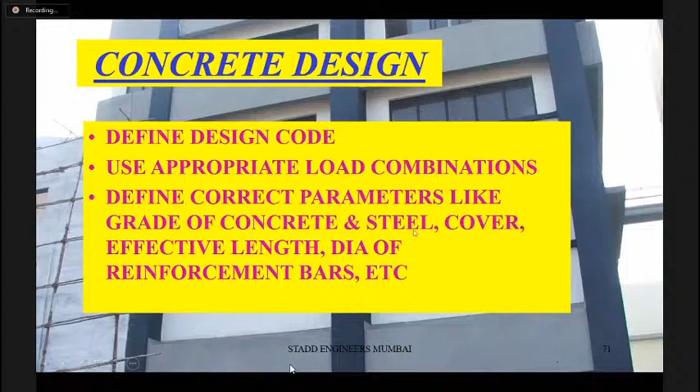There are some popular software packages. This is like a beam design output, but not a drafting - drafting is separately done in RCDC, so I will show you that also.

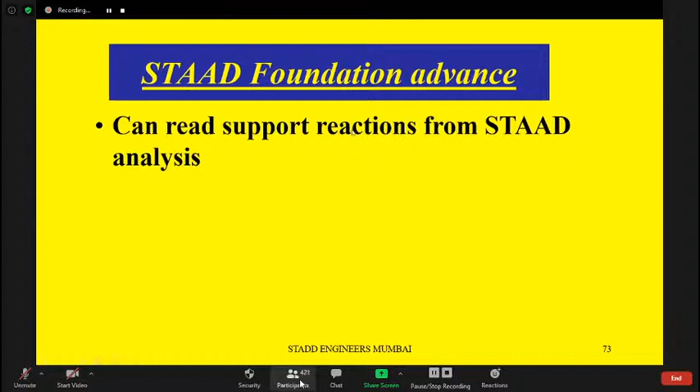After the analysis is over, you have to design the foundations. From the STAAD analysis, you can transfer data into STAAD foundation at once, which takes all the support reactions from the STAAD analysis. Once the data is available, you can design the foundations - it can be simple isolated foundations, or if they are overlapping, you go for combined foundation design. If three foundations are also merging with each other, then you think about raft foundation or mat foundation.

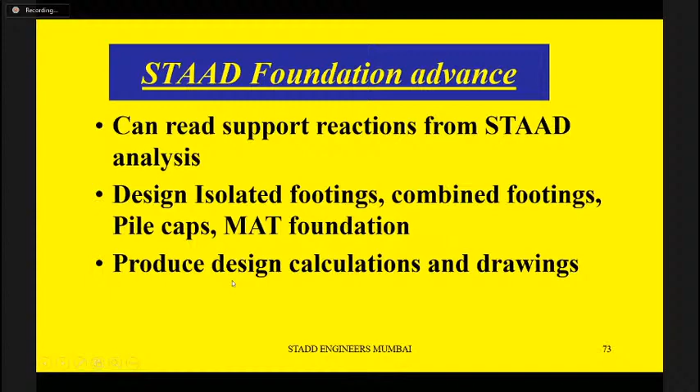Sometimes if the soil is not good enough, you have to go to deeper depths. If the strata is not good, you go for pile foundations, and there you design the pile caps. That can be done in this type of module, which will produce design calculations and drawings as well. Analysis of machine foundation is another important aspect of the STAAD foundation module, which can perform this type of analysis, or it can analyze vessel foundations, like horizontal vessels or vertical vessels in industrial structures.

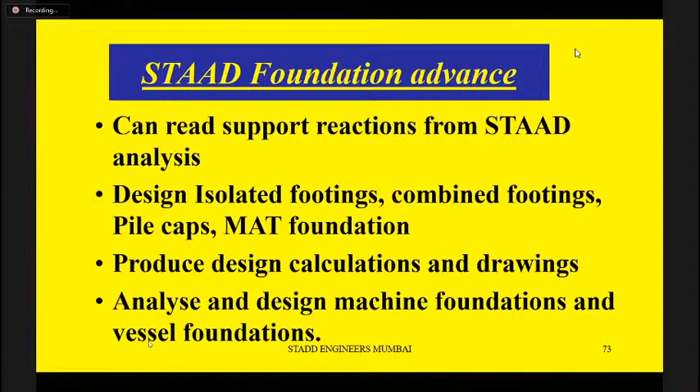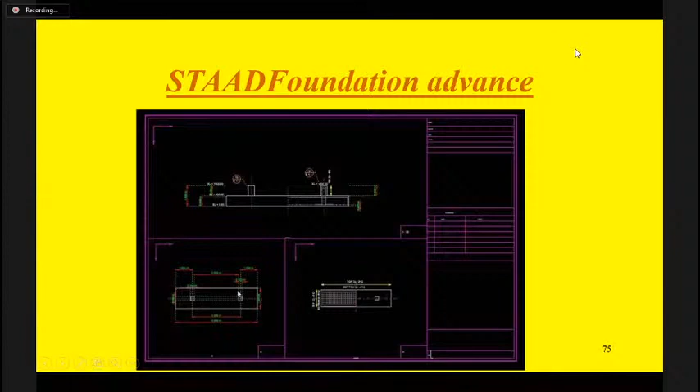This is again some combined footing. There are two columns, and this is a common footing for this strip type of foundation you can have. You can just detail it with the number of bars and all. That is producing some basic drawings, of course.

More powerful drawing generation will be through RCDC. Again, STAAD analysis is done, and RCDC can read data either from STAAD or from ETABS. I think mostly people are using RCDC for your detailing purpose.

So after the analysis is done, I can transfer data to this module, and then I can do the design of slabs, or design your beams, design the columns, design the shear walls, or do some isolated footings also, pile caps also, and some advanced module will, I think, support the flat slab analysis design foundation, called RCFE.

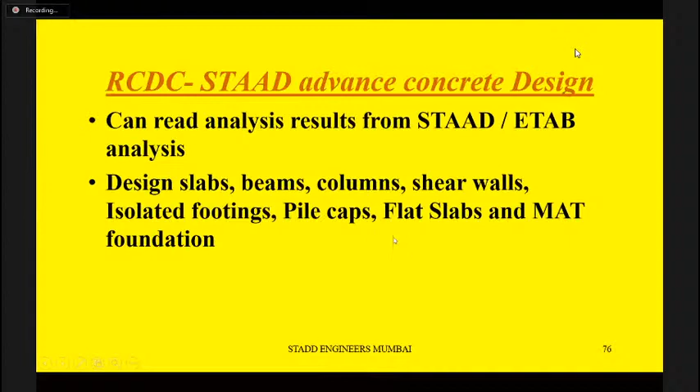So which is again a finite element based program, but the core will be from STAAD. So STAAD will be used for the analysis purpose. These are the different modules available.

Once you have the data ready and analysis is done, these programs can produce the drawings for you. And along with that, design calculations are also produced in RCDC, because RCDC is not taking the design from the STAAD program, but what it does is pick up the forces, and based on the forces, it produces its own design calculations and drawing.

And for the drawing, if you want to change some bars or some arrangement, you can do that interactively when the table is being produced. After you finalize the design, it will generate that into a particular drawing.

Then you can produce a bar bending schedule, and the quantity calculations also can be worked out for the beam. What is the quantity of concrete? What is the quantity of steel? Same thing for your column design, for the slab design.

Once I get the quantities, I can put in my rate and get the cost estimates also. You can put the rate for everything - the material rate, shuttering, concrete rate, steel rate, and all these things. So I can get a basic estimate also. That is possible, so this module will support you in doing the drafting.

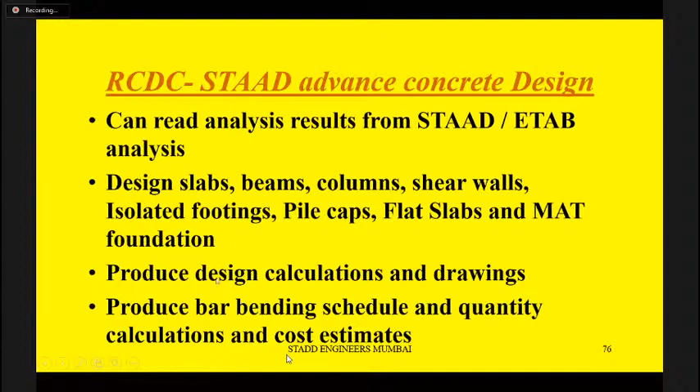And once you approve, this will produce your bar bending schedule also in the final part. So this is a detailed drawing, or you can have the tabular format drawing also available, where the schedule is being prepared. In the earlier days, most people were using only schedules, but I think the drawing is better all the time for better understanding at the site also.

So you will not make mistakes. If you exactly know up to what length the bars will be transferred, and in the cross section I can show the alignment of bars also, that is more clear. Otherwise it is left to the fitter and the site people whether to put all four bars in one layer, and if you do that, you will not have proper space for concreting. So detailed drawings are very important, where you have to show all the reinforcement details in the cross sections with spacing and everything in detail.

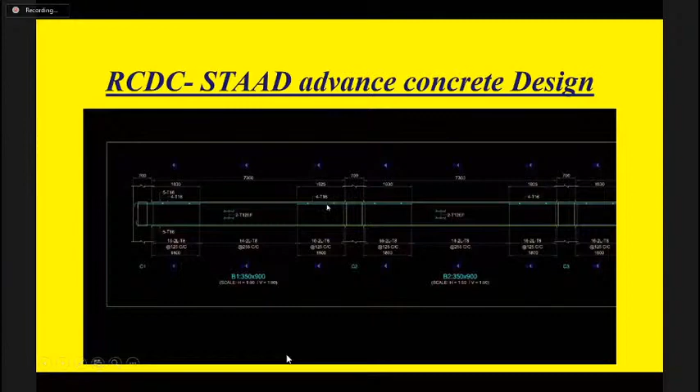I think for slabs also, it can be modeled in the slabs, and the pattern of the reinforcement will produce with the quantities and also. There are different modules like slab, beams. Similarly, you can produce a beam design also. In a table form, it will show the design first.

If I want to make any changes in the bar diameters, for example, instead of 20 mm, I have to use 25 mm diameter bar, and change the number of bars, you can do that. The program automatically checks the area of reinforcement and whether it is more than what is required. Only then will it allow you to change the bars, and accordingly, drawings will be automatically updated.

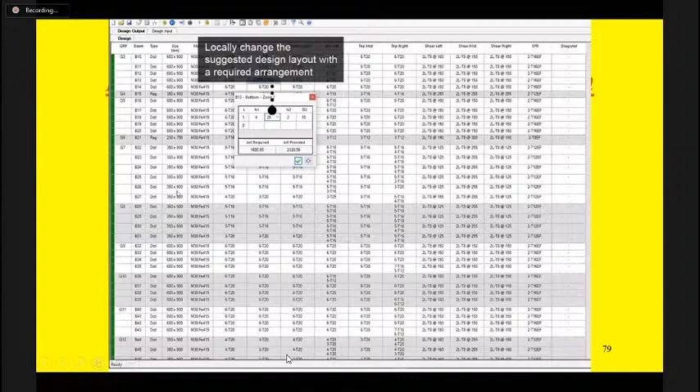So these are the facilities available. Some user interaction is also available, so you can modify the detail based on your own requirements. And after doing all these things, you can produce a bar bending schedule also, which is required at site basically.

What is the bar length required, what is the L bend here, what is the quantity of this bar, how many bars are required, and what is the diameter. So again, a summary will be available. On the summary sheet, I can order the reinforcement directly. For 8 mm diameter, I need so much kg of steel, for 10 mm diameter, so many tons of steel, and so on. So this is a very useful tool again.

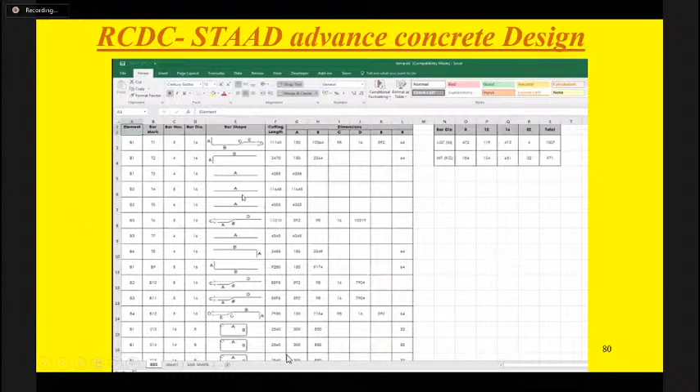People feel that once you use software, most of the time they say, okay, this is a result produced by ETABS, or this is the output of STAAD. But if the output is wrong, then what is the use? So most important is your hand calculations and cross-checking the results all the time.